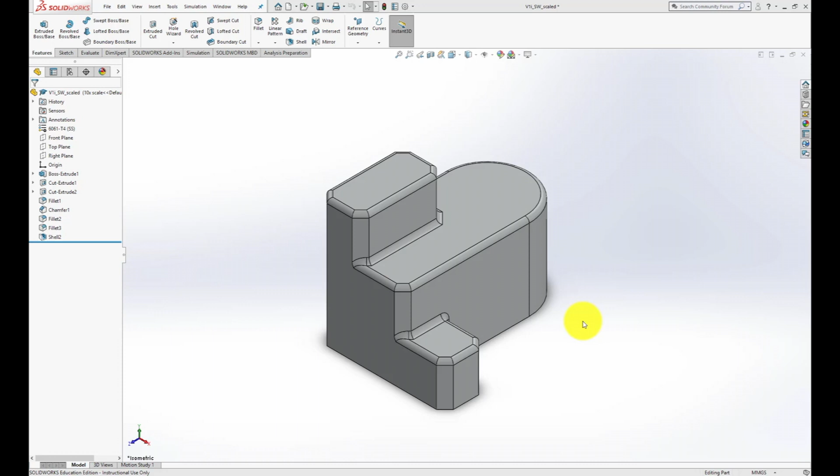So in this video I'm going to take this part, which is a shell, and I'm going to put a pattern of holes right through the side of it. So I'm going to start by drawing some sketches, and I'm going to draw a sketch on the right plane.

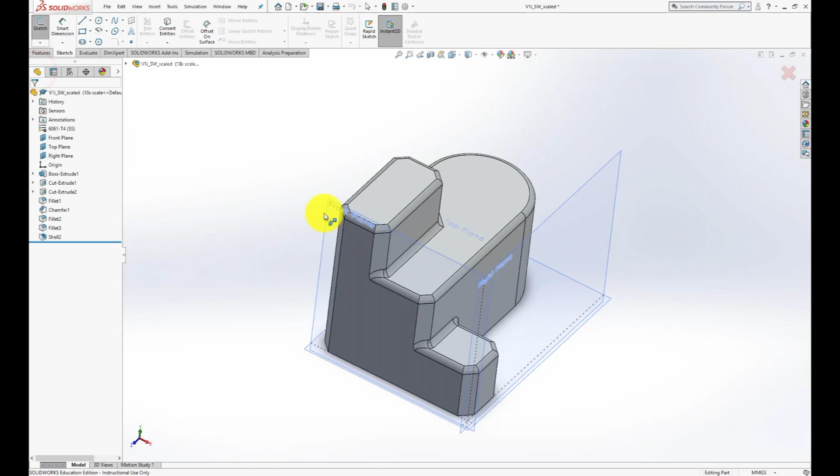So I'm choosing that now, and I like, of course, to see that sketch from the normal view, so I'm going to tell it that's what I want to do, and I'm just going to pop a circle down here right at this first spot. Then I'm going to use my Smart Dimensions to get this to be a circle of 5 millimeters in diameter.

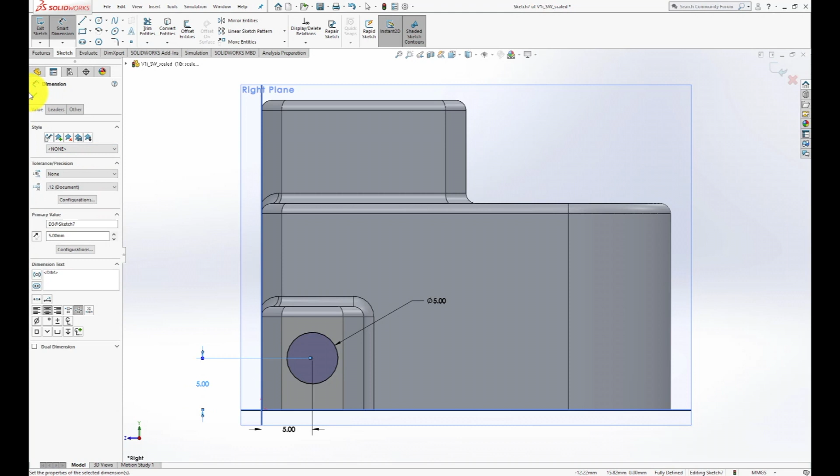Then I'm going to place that circle 5 millimeters from this edge and 5 millimeters from the other edge. Of course, I'm just using the Smart Dimensions to help me with that. So I'm going to accept that circle within that sketch, and then accept that sketch. Now you can see I have that sketch on the right plane.

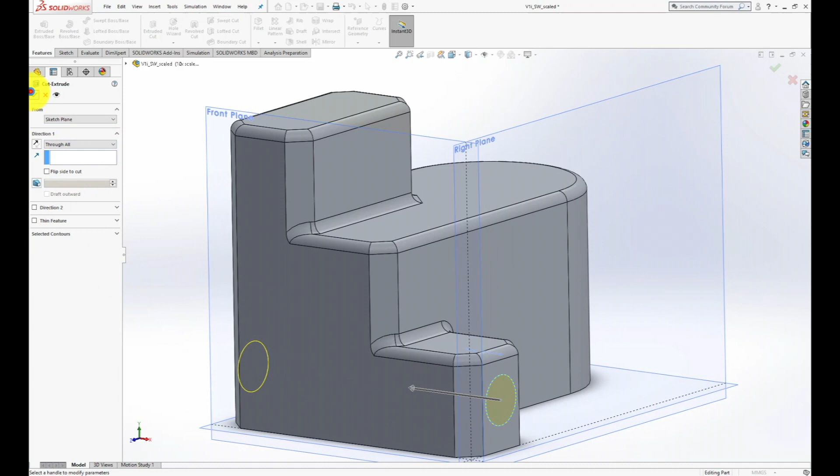Now what I'm going to do is make an extrude cut, and as I make that, you can see that it's trying to just go through a portion of my product. So I'm going to tell it that I want it to go through all of the product. Now I have a hole that indeed goes all the way through.

Now what I want to do is I want to pattern this hole in both directions. So I'm going to use the linear pattern. The first thing I'm going to do is select the feature that I want to pattern. And I've selected that cut extrude. Then I need to choose the direction that I want to have it be patterned.

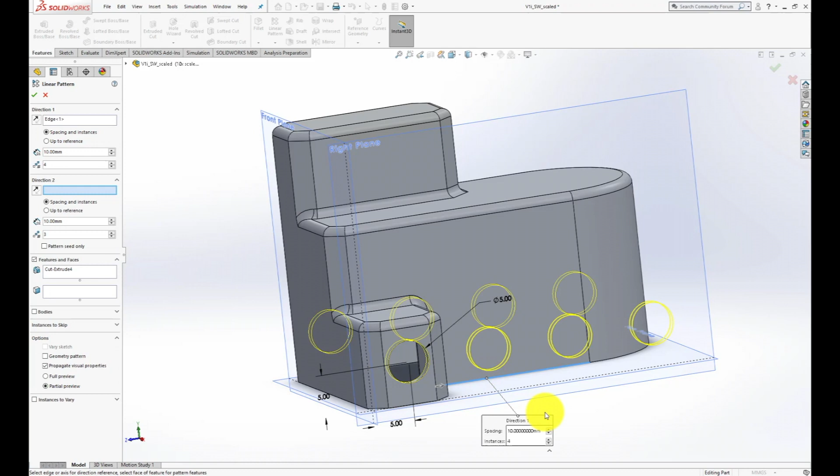And so I choose this direction, and it goes off to the right. You can see there's a preview on what it might look like. But if I hit this little button over here, I can change the direction of that. Sometimes that's necessary. Of course, it chose the right one. Now I need to get the other direction.

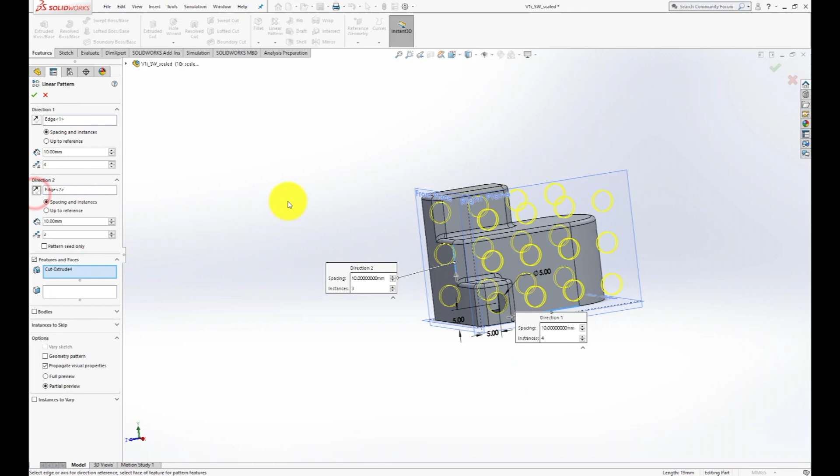I'm going to choose a vertical direction here. And in this case, the holes are headed in the wrong direction, so I'm going to flip that. Now I can see this is the pattern of holes that I would love to have on this part. So I'm going to accept that. And as I accept it, I now have a pattern of holes.

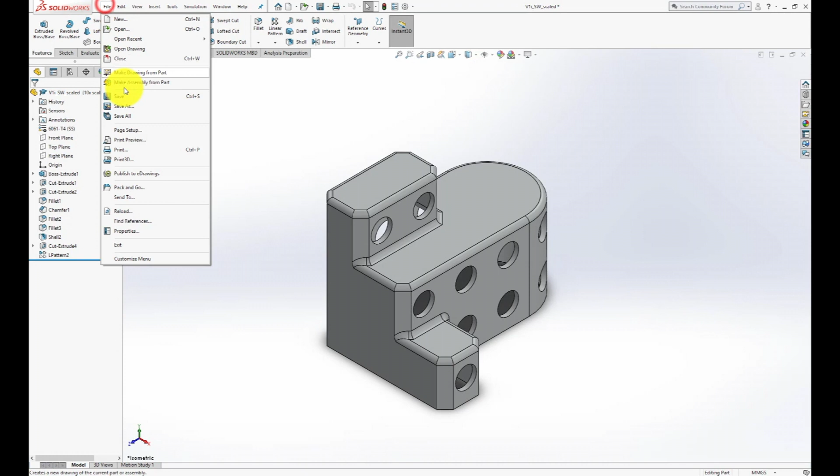Now I encourage you to get in deeper here and figure out how to do a radial pattern. We just showed you how to do a linear pattern here, but a radial pattern is also a valuable thing to learn to do. Good luck.